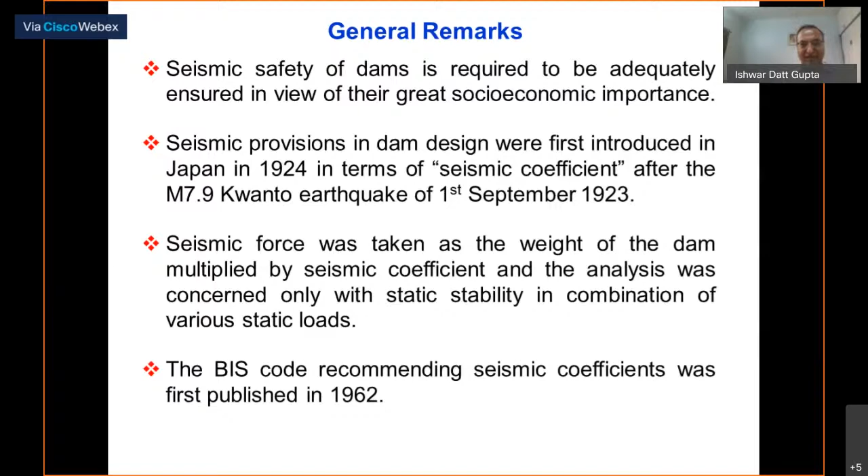The provisions for seismic coefficient in India are defined in the Bureau of Indian Standard Code, first published in 1962 and revised several times, but there has been no fundamental change in the philosophy of design, only updates following the occurrence of some damaging earthquakes in different parts of the country.

The most recent code, brought out in 2016, divides the country into 4 seismic zones, and for each zone gives recommendations for finding the seismic coefficient, alpha H, in terms of a zone factor, the importance factor of the structure, and a response reduction factor to account for the reduction.

And they give a standard normalized spectral shape. So this methodology is largely used along with the design provisions given in another code for concrete dams, that is IS 6512, criteria for design of solid gravity dams.

The entire design is governed by a simple equation in which the sliding of a block of the dam along a pre-selected horizontal plane is designed against all the horizontal destabilizing forces. Here, this is the frictional force and this is the cohesion force.

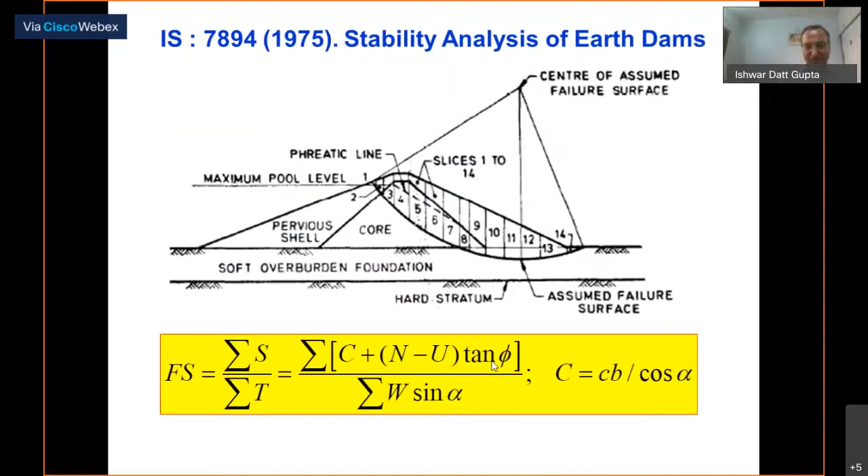So after this experience, to ensure the seismic safety of dam, it is essential to design and analyze the dam for the actual dynamic effects of earthquakes, using the actual earthquake forces expected at the site of the dam, and not the seismic coefficient, which is highly reduced in an artificial way to represent the earthquake forces.

So the philosophy of design has to move to stress analysis, or in case of earth and rockfill dams, to see the permanent deformations under the dynamic effect of earthquakes. So all the dams in our Himalayan region are in fact more prone to seismic damage.

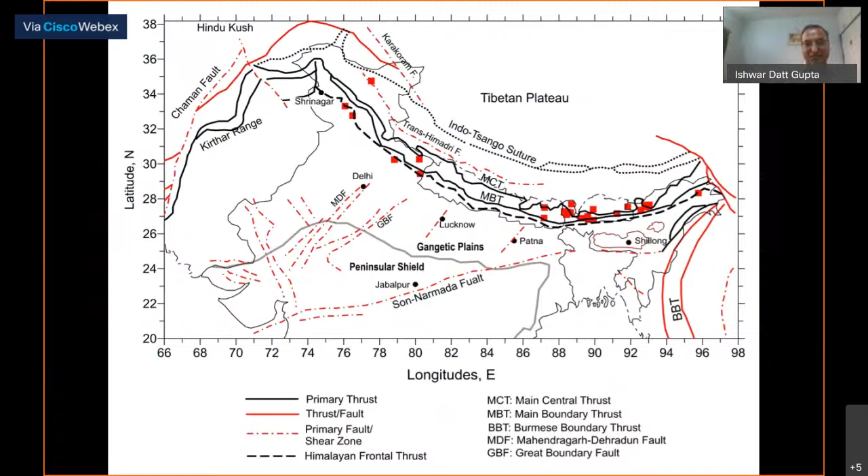This shows the seismicity during the last 200 years, and if we see the Himalayas and northern part, a lot of earthquakes have occurred in the past, and we have experienced 4 great earthquakes of magnitude 8 or more.

We have to definitely design all the dams in the Himalayan zone by dynamic analysis rather than the seismic coefficient, which is not able to ensure and evaluate the seismic safety in an explicit way.

So we have to change the design philosophy from stability analysis to stress analysis under realistic ground motion, using parameters in terms of the response spectra and the acceleration time histories.

Response spectra methods are simple to apply, and can be a replacement for the current use of seismic coefficient, because in principle, the response spectra method has been developed in such a simplified manner that they are almost identical in the analysis to the stability approach.

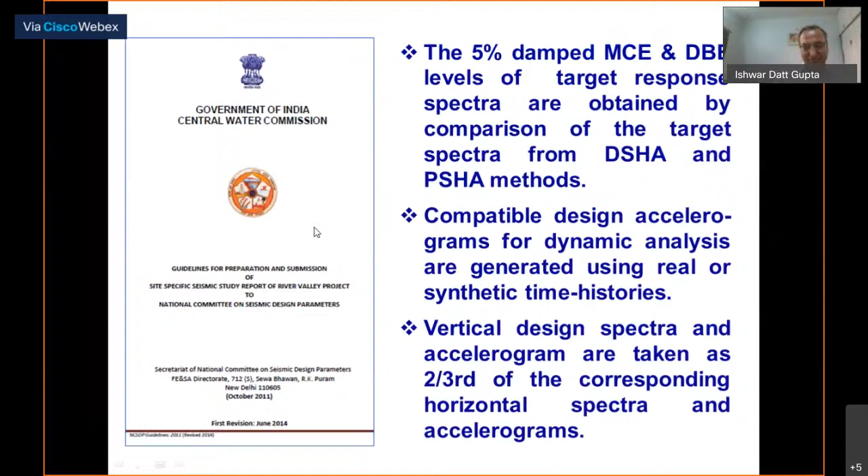And for estimation of these parameters, we are following the guidelines brought out by our National Committee, known as the NCSDP guidelines. NCSDP stands for National Committee on Seismic Design Parameters. And these guidelines are more or less in consonance with the ICOLD Bulletin 148, with slight modifications.

So I will show how we are applying these guidelines with one typical example of a dam site in the Arunachal state of India, that is the easternmost part of the Himalayas, and a dam I analyzed there, and I will show what level of spectral amplitudes and accelerations can be experienced.

So these NCSDP guidelines, which we are following, recommend that we have to estimate the design parameters in a site-specific way using deterministic as well as probabilistic approaches.

The design motion is determined by comparison of both, and if the results from the two methods differ largely, then we have to rationalize the results, because the deterministic approach involves a lot of subjective decisions which at times may not be scientifically rational. So the probabilistic approach provides a benchmark to compare the design parameters from a comparison of the results of both approaches.

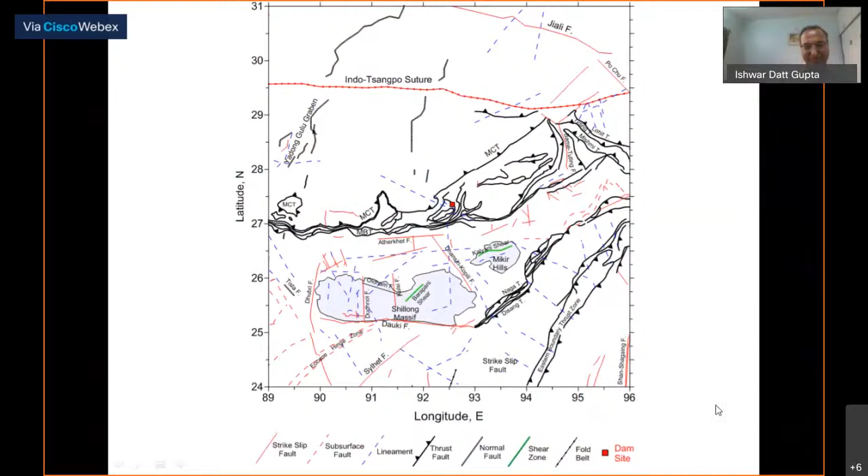And we had a great earthquake in 1897 with magnitude more than 8.2. At that time it was estimated as 8.7. So if we see the seismicity, this entire area of about 7 degree by 7 degree latitude-longitude is studied with the epicenters. So there is no place where there is no seismicity. This is a highly seismic region, and this is the site where we have to estimate the design parameters.

So I told you the first step is to make the various source zones based on tectonic characteristics, the occurrence rate of seismicity, as well as the maximum magnitude which can be expected, considering the variation in the level of seismic potential and changes in tectonic characteristics. We divided this region into 15 different source zones, named according to their tectonic features.

Defining these source zones is the first step, and then we estimate the seismicity for each source in terms of the occurrence rate defined by the Gutenberg-Richter relationship, where log Nm equals a minus bM. Nm is the cumulative number of earthquakes with magnitude greater than or equal to M, and a and b are constants estimated by regression analysis of the past seismicity data.

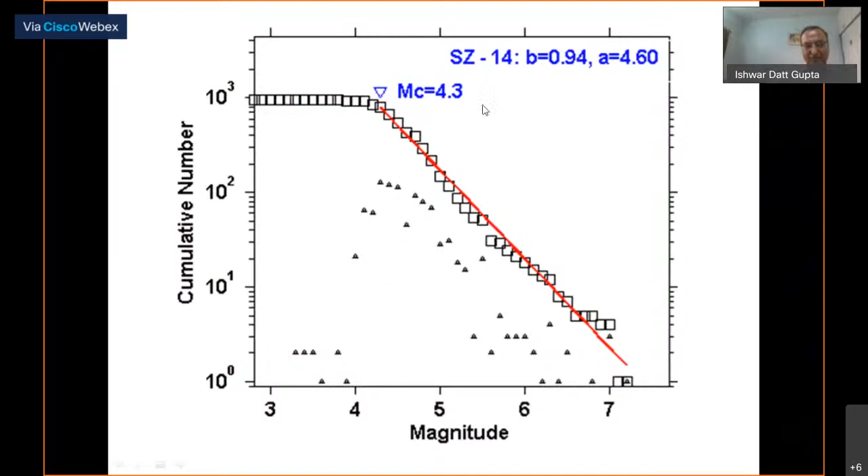So there was a big database of more than 4,000 earthquakes used for this, and we defined this Gutenberg-Richter relationship for each of these source zones by considering the completeness of the earthquakes, because very small magnitude earthquake rates are not accurately captured due to lack of recording for small earthquakes in older periods when instrumentation was very sparse. So we used this relationship for each source zone to define the occurrence rate for different magnitudes of earthquakes.

Then we select an attenuation or ground motion prediction equation, which is used to compute what ground motion can be expected, and this has to be region specific, as we don't have an adequate number of recorded strong motion data to develop our own independent relationship.

I used the limited data available to select the most appropriate equation from the published relations. Using that database, I applied criteria in terms of the statistics of the residues between the recorded data and the predictions from the selected equations.

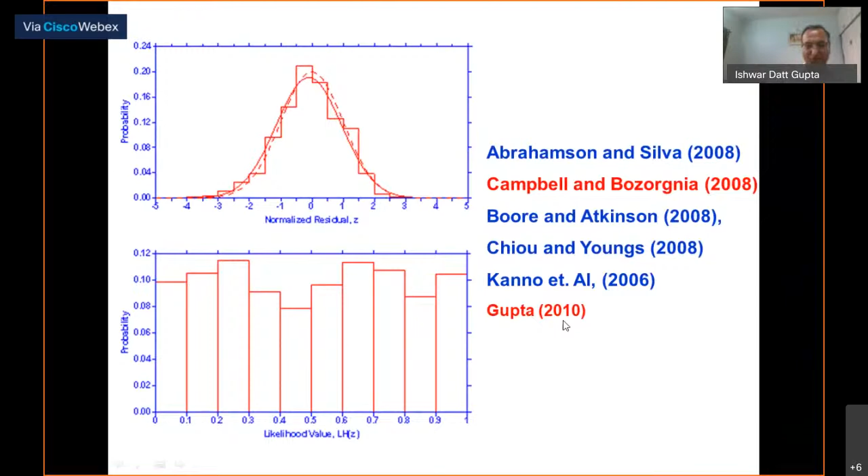Then coming to the deterministic approach, in that we consider only limited combinations of the maximum magnitude and minimum distance at which they can occur on various tectonic features in the region, and select the controlling combination of maximum magnitude and distance.

And for that, we compute the response spectrum with 5% damping from the selected equations for ground motion prediction. That is known as the target response spectrum obtained by the deterministic approach.

But in case of the probabilistic approach, we consider all the expected earthquakes with different magnitudes with their occurrence rates to find out the target response spectrum. So we consider rates, where Lambda n is the occurrence rate of magnitude mj in the nth source.

And this Qn is the probability of exceeding a spectral amplitude due to magnitude mj, distance Ri, from the selected ground motion prediction equation. So by combining all these probabilities, we define a total probability for the exceedance of different spectral amplitudes, and from that we define a uniform hazard response spectrum with 5% damping, which gives us the target spectrum by the probabilistic approach.

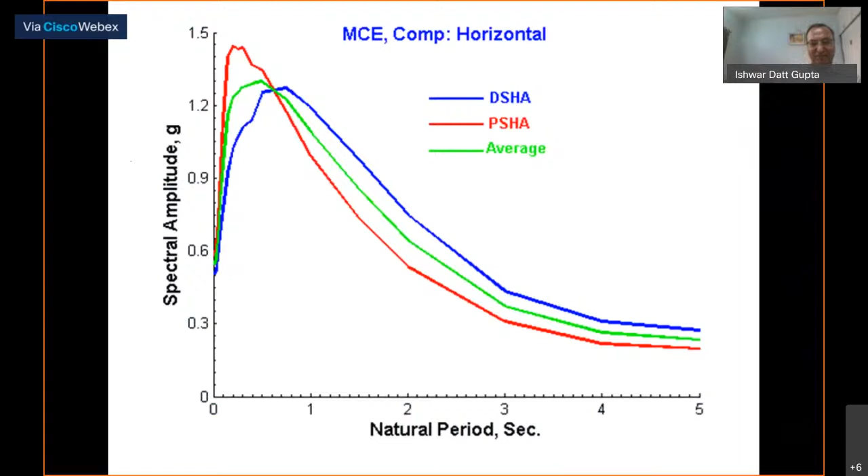So as per our NCSDP guidelines, here we took a weighted average of both the spectra to define the final target spectrum. Similarly, this is the target spectrum for the DBE condition.

And for this target spectra, we then generate the acceleration time histories, whose spectra match this target spectrum closely, and therefore these design accelerograms are known as spectrum compatible time histories.

There are two ways to do it. We can generate these time histories compatible to the target response spectra synthetically, artificially, or we can select real time histories of earthquakes and modify those to match the target response spectra.

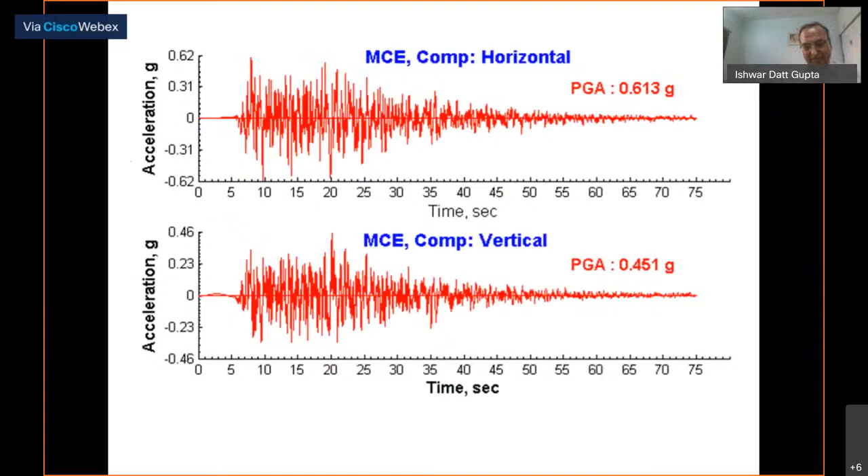If we have to do detailed analysis, then we have to go by a set of recorded time histories modified to be compatible with the target spectra, but for simple linear analysis, synthetic time histories can also be used.

These are the horizontal and vertical time histories for use in detailed dynamic analysis. And from these time histories, because the target spectra are defined for a specific damping...

These time histories are then utilized to generate response spectra for several different damping ratios of 2, 3, 5, 7, 10, and 15% of critical, because we may need the spectra for simplified analysis with different damping values. So these are the spectra and the time histories provided in our site-specific reports.

And this one example I have shown for Northeast India. Now, as this sort of detailed analysis cannot be done quickly and readily for each and every project, particularly for the feasibility stage and initial stage design of dams.

So it is essential that we develop hazard maps which can be utilized to see the stability of the preliminary design of the dam. To illustrate that, I have carried out an analysis where I generated such a hazard spectra and how those can be utilized to generate the target spectra for the northwestern Himalayan region.

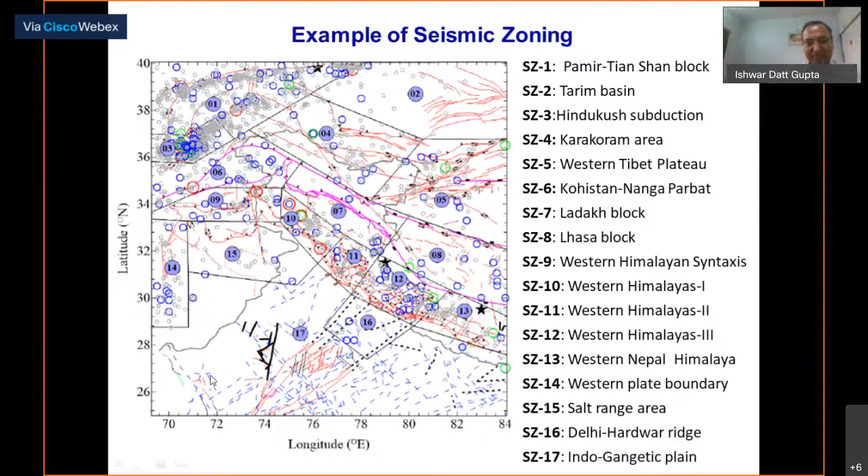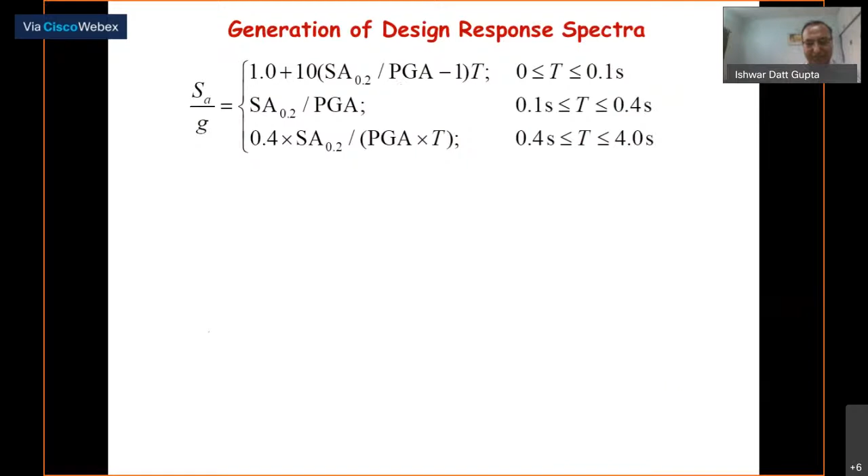And this equation has been based on the ASCE 07 code, but with some modifications to suit our region of interest. Using this equation, we can generate the design spectra, and those are compared with the standard spectral shapes given in our BIS code, based on the ASCE formula and the proposed formula in this study. So they differ slightly.

Design spectra readily generated, a sort of first cut for the site-specific analysis, and these can be used with the simplified dynamic analysis using these response spectral amplitudes to find out the stresses at different elevations in the dam, or to find out the permanent deformation in case of earth dams, and to see whether these are within the permissible limits.

So this is the recommendation that we have to give up the traditional pseudostatic approach and use the spectral amplitudes to find out the stresses or the permanent deformations in concrete and earth dams respectively for their preliminary designs. And if they satisfy these dynamic stability requirements, the static stability is automatically ensured.

Because the static stability is analyzed under much reduced seismic coefficients, and that doesn't automatically ensure protection against damage due to tensile stress. But the stability against tensile stress will automatically govern the stability against sliding and overturning.

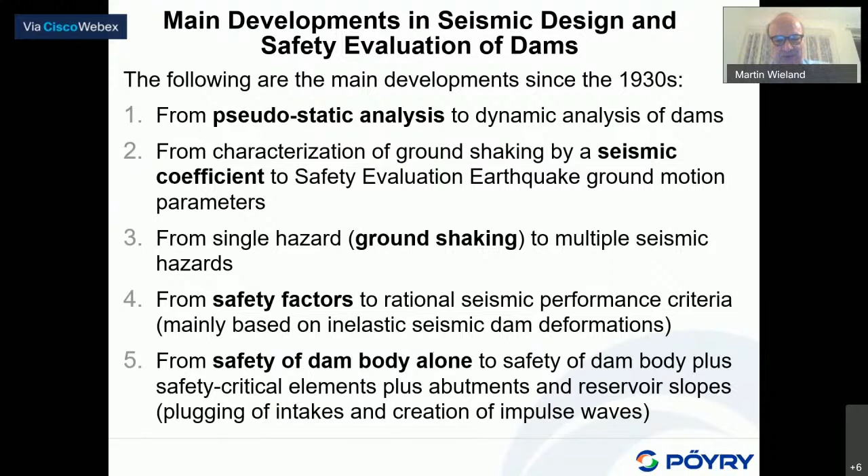So therefore, these reservoir slopes - and even further, as this Indian case has shown - you have to look even beyond the reservoir slopes.

Why do we need safety evaluations of existing dams, and why do we have to do that periodically? I mentioned already at the very beginning that the service life or economical life of a dam can be very long. For an embankment dam, built of natural material, I think it can survive hundreds of years if it is well maintained. For concrete dams, I think they can also survive a long time.

The oldest Swiss concrete dam, which is the oldest one in Europe, is now 140 years old, and the concession has been extended - it will easily reach 200 years. So what has been written in a recent UNU report is that there is a huge threat to people living downstream of aging dams. I think these people, in my opinion, don't understand the problem properly. It is not basically the aging of a dam which increases the risk.

It is more that the people living in a downstream area of a dam has increased rapidly. So therefore, the risk, in the case of a dam failure, has increased substantially.

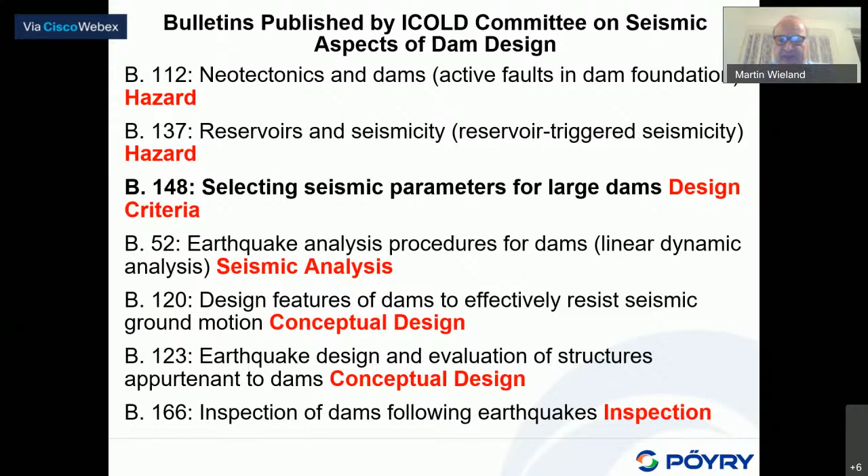There are some design features of dams to effectively resist seismic ground motion, which is concerned with the conceptual design. If you follow this criteria given in the guidelines, you will arrive at a dam which is seismically safe. If you then do the safety check, I must say if you follow this criteria, your dam, especially smaller or medium height dams, will be safe. There are also design criteria on appurtenant structures, and guidelines on the inspection of dams. That is what my committee has been doing in the last year, covering most of the important aspects of seismic safety of dams.

Let me say something quickly about Switzerland. For existing large dams in Switzerland, just to give you an idea, the average age is about 75 years, and we have 202 dams, which are mainly all concrete dams or run-of-river power plants. We have only a handful of embankment dams, which is different from other countries. But in mountainous regions, concrete dams seem to have some advantages.

Just to give you some view of Switzerland here: this is the Grande Dixence Dam, which is still the world's highest gravity dam at 285 meters. Until about 7-8 years ago, it was the world's highest concrete dam. This year it will celebrate its 60th anniversary. No very high dam has been in operation for that long. In India you have the Bhakra Dam, which is also almost of similar age, though a little less high than the Grande Dixence Dam.

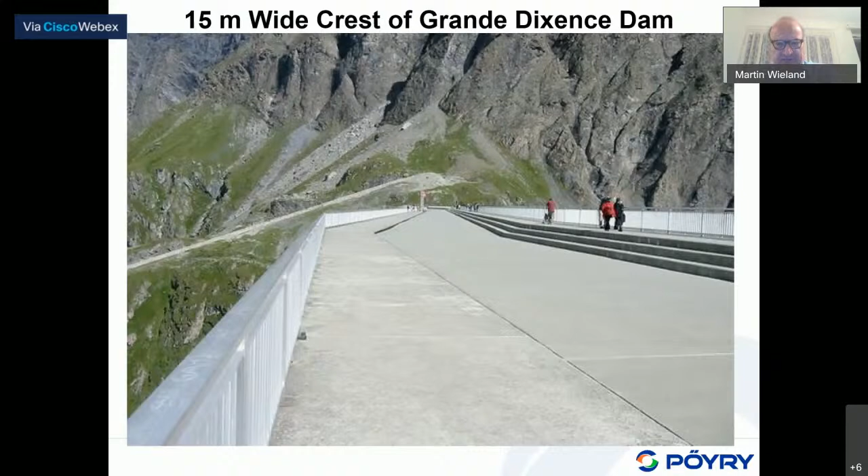This is the same dam. We also have a lot of mountains - of course in the Himalayas, the mountains are 2,000-3,000 meters higher. These are about 3,000 meters here around Grande Dixence, which is at about elevation 2,300. These dams are built in difficult topographical and climatic conditions, and during construction people could only work during summertime. You also have the problem of glaciers, and people have investigated the effect of avalanches in a reservoir and impulse waves created by such incidents.

This is the Mauvoisin Arch Dam. It belonged to our company before. It is 250 meters high, completed in 1956, so it's 63 years old already. As you see here, this picture is from a few years ago, but the concrete looks quite fresh here in wintertime.

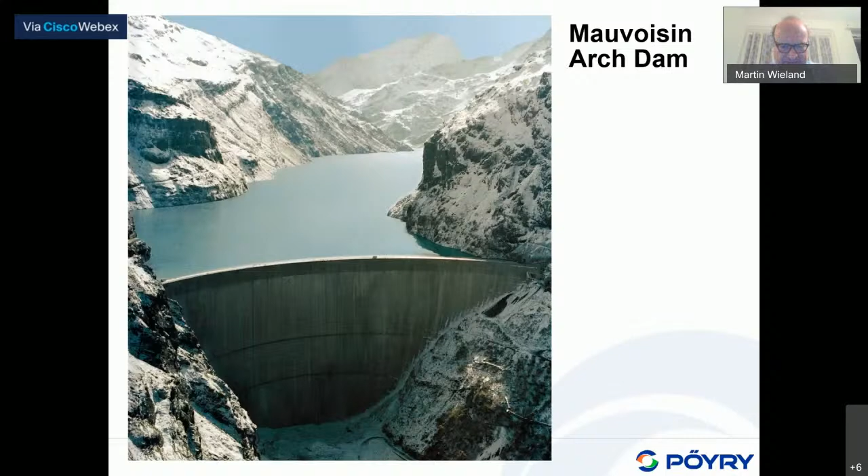A characteristic is that the reservoir rim is quite steep, so it was possible to increase the height of this dam. The original height was 237 meters, and in 1991 the height was increased by another 13.5 meters. Because the dam crest was very thick, 60 meters, it was easy to increase the height by 13 meters without having to strengthen the shell. As I mentioned, for dams with large reservoirs, the crest had to be very thick because of military reasons.

A few examples of dams in highly seismic regions: the biggest dam in the world is the Usoy Dam in Tajikistan. It is 650 meters high, twice as high as any man-made dam. It was created by a huge landslide, triggered by a magnitude 7.3 earthquake 110 years ago. So as I said, if you have a big earthquake like in the Himalayas, you will have thousands of mass movements, some of which may block rivers and transport a lot of debris.

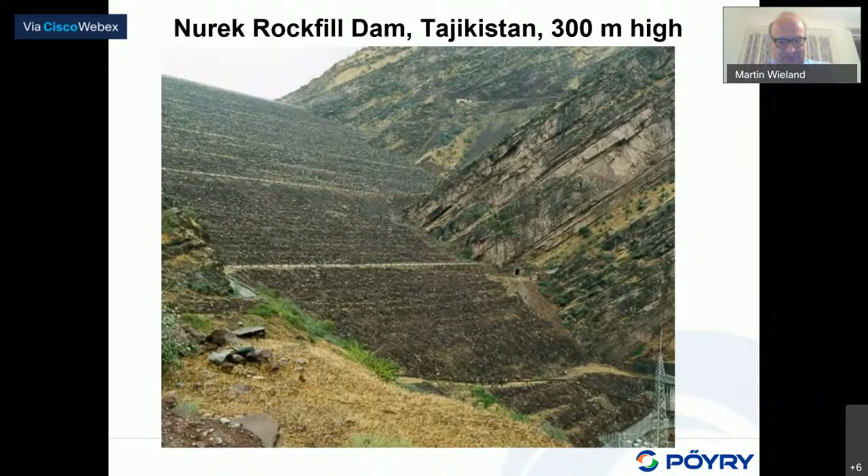This is in that region. What we see here is from the upstream face.

This is also from former Soviet Union. This is the Inguri arch dam. It was the highest arch dam until recently, with 272 meters.

Here in India, people talk about the Tehri dam project. I was also originally involved with NHPC in, I think, 2007, and we did the seismic analysis and design of this gravity dam. I believe the seismic input was provided by Dr. Gupta at that time.

This is a very highly seismic area. This is a project which was just completed in Pakistan, in Kashmir. On the right side you may see a small embankment dam. That is the location of the main boundary thrust, one of the main fault zones in the Himalayas. There was a strong earthquake in 2005 which killed about 80,000 people in that area.

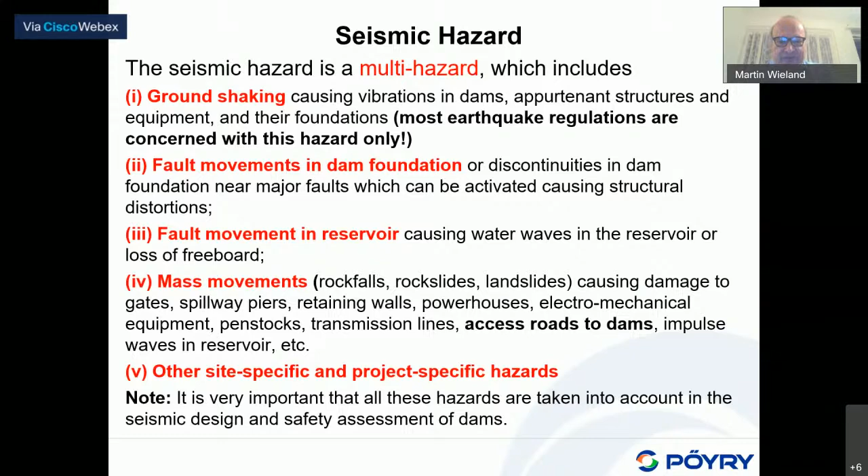In the meantime, people have measured peak ground acceleration close to an earthquake, I think in Japan, up to 4G. So what I want to say is even moderate earthquakes - 5.5 magnitude, 6.2, 5.3 - may create quite big accelerations. But peak ground acceleration is only half of the story, because damage processes in dams depend on the duration of strong ground shaking. If shocks only last 1 to 2 seconds, they do not create big damage. So it is more the long duration - I'm quite happy to have seen the records from Dr. Gupta, who also used, as we propose, a reasonably long duration of strong ground shaking. It is very important to make this conservative assumption.

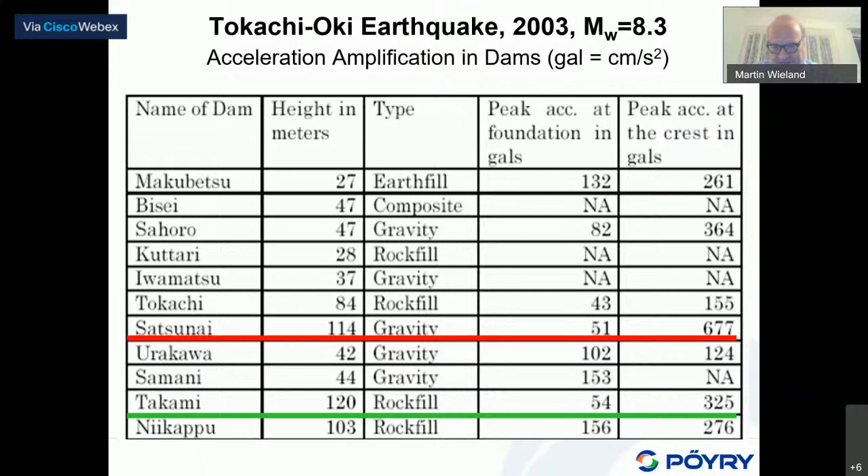The second case, the green one, is a 120-meter high rockfill dam, also with a peak ground acceleration at the base of 54 gals - gal being a Japanese unit, where 1 gal is 1 centimeter per second squared. The crest value is 325, an amplification factor of 6. Usually, seismic analysis of embankment dams gives amplification factors of 1.2 to 1.5, with 2 as an exception, but for smaller ground shaking you can still see quite larger amplification effects. These are actual measurements.

This is an example from the Andaman Islands, which belong to India - the Kalpong Rockfill Dam. The loss was mainly due to tsunami, but this dam also showed a longitudinal crack along the dam crest, on the biggest dam in the Andaman Sea.

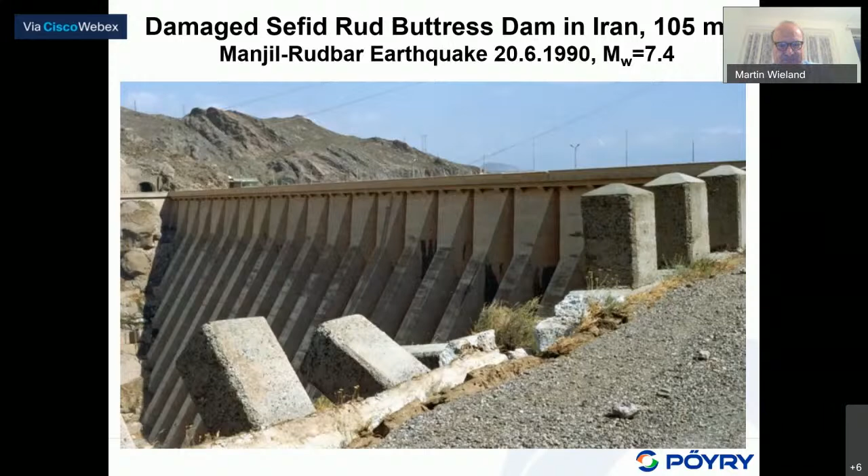Cracks occurred at the upstream face, mainly along the lift elevations. You can assume that in concrete dams, cracks will not occur just anywhere - they occur, for example, at lift elevations, or at elevations where there are sudden changes in geometry, at kinks. This crack is not just a surface crack - it penetrates through the whole dam body, 20 meters into the buttresses.

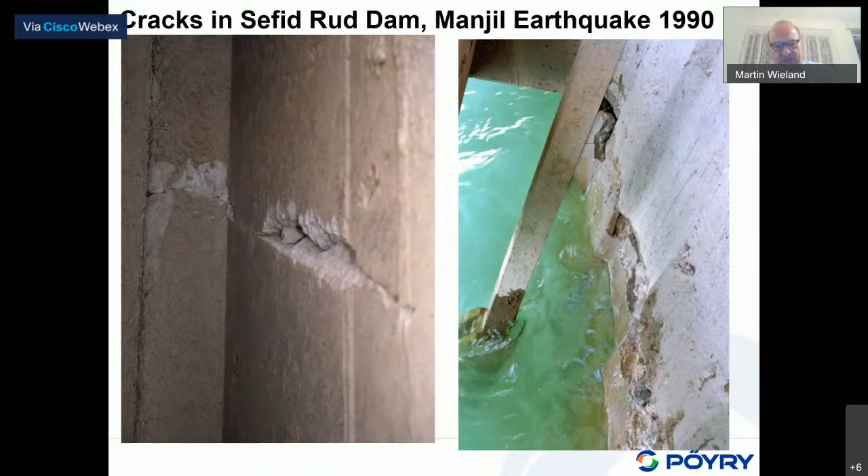This was expected because the buildings are not designed against that high level of earthquakes. The dam itself only had some cracks, but the buildings were all destroyed. You see here some equipment, a transformer that derailed.

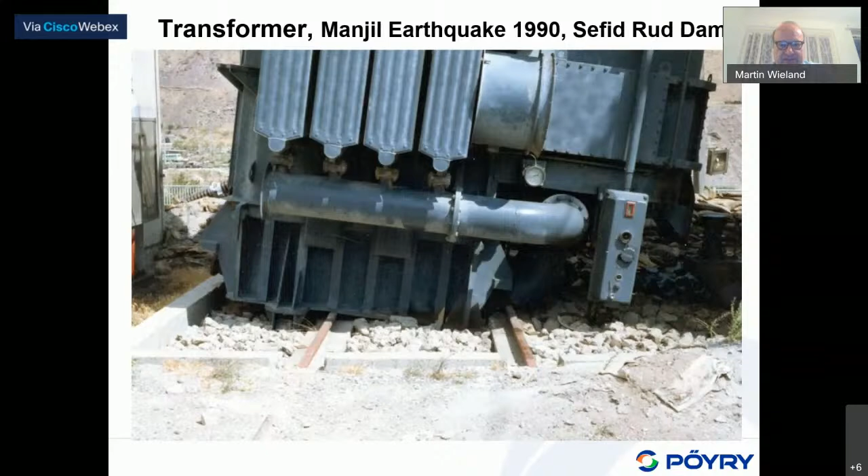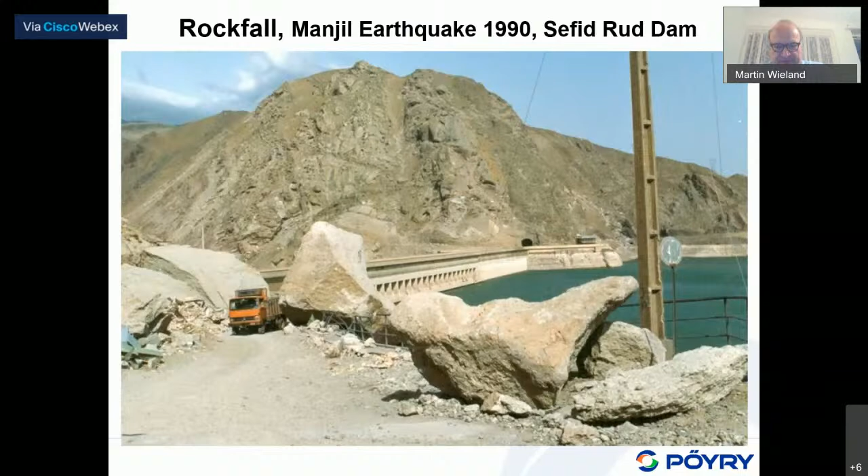The dam was strengthened after that earthquake by a number of rock anchors. Each block had 12 rock anchors with a capacity of 100 meganewtons, 10,000 tons, to strengthen the top where the cracks had occurred.

You see here this work which was going on. It cost about $25 million at that time, in 1990-1991, when this was done - these rock anchors. There was also some leakage, so epoxy grouting was done, and this is some drilling operation for the grouting.

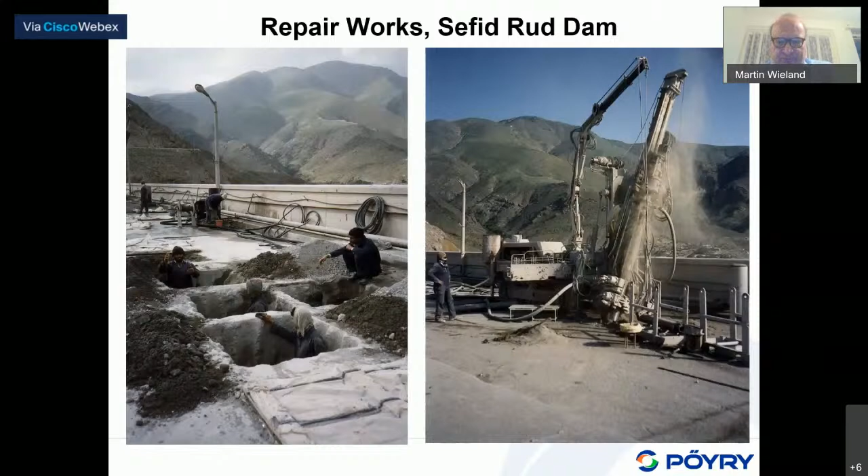These anchors were installed - this is during the installation. It was on all the blocks of this buttress dam.

The famous case is the Koyna Dam in India. You know the Koyna Nagar earthquake, magnitude 6.3 or 6.5 - we like to refer to it in my committee as 6.3. There were some cracks at the location of stress concentration.

The geometry of this gravity dam is unusual. Normal gravity dams have just a constant slope, but here it was decided to heighten the dam during construction, creating this weakness at this kink. After that earthquake, it was strengthened by rock anchors, by anchor bars as shown here.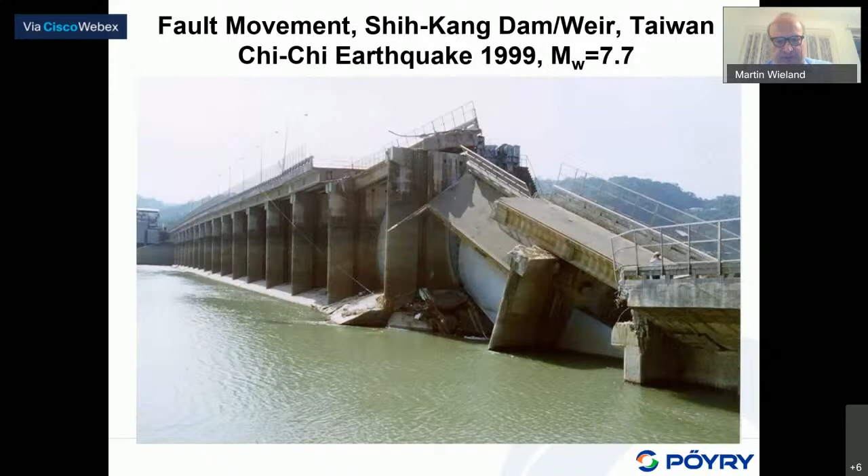If there are major fault movements, you have to assume that concrete structures cannot resist such movements. As seen in Taiwan in 1999, it destroyed 2 openings of this weir. The reservoir was released, but it didn't result in a catastrophic flood downstream because during the monsoon, all 20 or 22 gates are open, so they release much more water than the failure of these 2 gates would. But if you have substantial displacement, you basically cannot prove the safety of the dam. You should not, you must not, build concrete dams across faults. You cannot protect them.

Seismic performance of embankment dams. This is from the Bhuj earthquake. A lot of small earthen dams were damaged. Fortunately, no catastrophic release of water occurred because in January, now 20 years ago exactly, the reservoirs were basically empty.

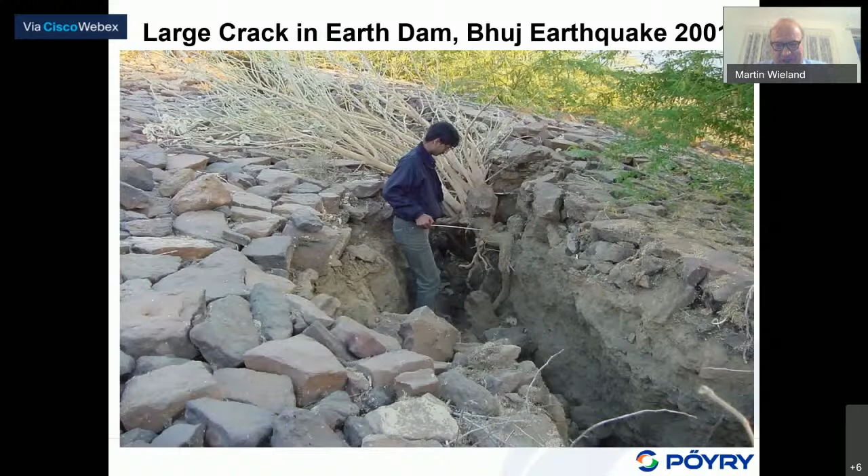Also from the Bhuj earthquake, some cracks, some larger cracks in earthen dams. Some of the cracks are wide. Some people think cracks are very deep, but they are not so deep, because in earth structures, the horizontal stress is about 0.5 times the vertical stress. So the deeper you go, the larger the horizontal stress, which prevents propagation of cracks to greater depth in earth structures.

Some typical cracks. It is Dr. Jain, Sudhir Jain, my old friend. I think now he's director of IIT Gandhinagar.

Liquefaction is a problem, and that is basically why I started my career as an earthquake engineer, because after that earthquake I worked in a laboratory of hydraulics, hydrology, and glaciology at the Swiss Federal Institute of Technology. People were concerned about the earthquake safety of dams, and at that time people still thought that by early warning you could protect the people, but this was a too optimistic assumption. Here is a hydraulic fill dam - this earthquake's anniversary was just 50 years ago, on 9th of February. Due to liquefaction, we have very large displacements of about 60, 70 meters of this embankment dam.

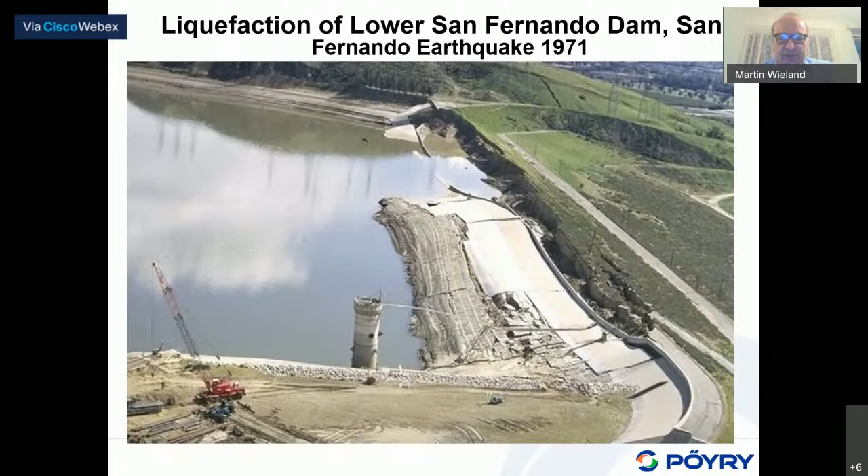Here's another photo of this dam when the reservoir was slightly lowered. This is basically the start of modern earthquake engineering in dam engineering. Since 1971, people basically know that the pseudostatic method is not suitable for checking the seismic safety of dams. It's not something new, it's already 50 years old - people doing structural analysis knew it even earlier. But this earthquake has shown that these methods are obsolete, and based on that experience the development has been going on, and the pseudostatic method has been replaced, but it is still being used in some places, as mentioned - India, China, South Korea, and so on. It should not be used in highly seismic areas.

This is from the Kobe earthquake, which shows that in the upstream face you actually have a slope failure, like the slopes you assume if you do dynamic stability analysis. I must say I have to speed up.

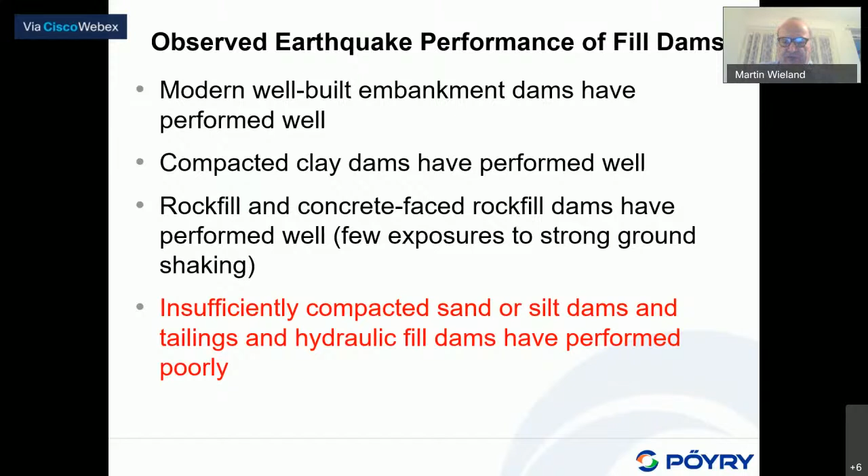Observed earthquake performance of fill dams: modern well-built embankment dams have performed well. Compacted clay dams have performed well. Rock fill and concrete face rock fill dams have performed well. The dams which have shown problems are insufficiently compacted sand or silt dams, mainly tailing dams, and as shown before from the San Fernando earthquake, the hydraulic fill dams. These are the dams which behaved very poorly under strong earthquakes.

Now, seismic design criteria for large dams. The safety criteria are as follows - this is relatively new, so please keep in mind these general safety criteria. Number one, to retain the reservoir, which is what people have always done and are doing now. And the objective, as mentioned at the very beginning, is to protect the communities downstream from a catastrophic release of water. This is always the case.

But number two, which people have not really looked at, we must be able to control the reservoir after an earthquake. Because if your spillway or low level outlets are out of order and the power plant is shut down, you cannot release any water. So depending on how full the reservoir was and what the inflow is, it may overtop days or weeks after the earthquake. People have not really realized that.

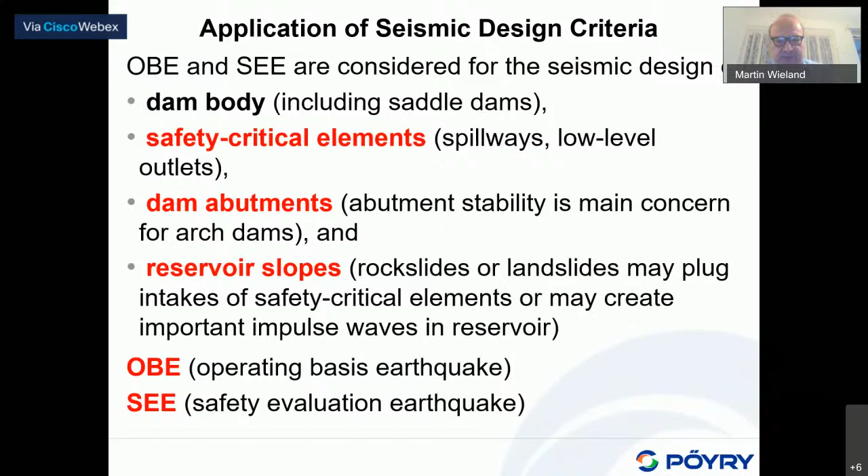Now, what are the good news on the earthquake safety of dams? For water storage dams, I would say embankment dams, only one dam failure with loss of lives worldwide up to now, during the 2011 Tohoku earthquake, 10 years ago, where 8 people were killed in a flood wave released by this reservoir. For concrete dams, no concrete dam has failed which has caused loss of lives up to now.

This is good news. Secondly, tailings dams. Several tailings dams have failed during strong earthquakes in Chile, which caused loss of lives. Tailings dams are a problem, basically because those mining companies' core business or core competence is not in dam engineering, so they think it's a nuisance to have these tailings dams. So sometimes you may get the impression that some of these tailings dams are really not safe, otherwise they would not have failed like in Brazil in recent years, also in Australia.

Note please, the excellent seismic performance of water storage dams shows that the seismic safety concepts in use have been very successful. It does not mean that these dams are over-designed and the seismic safety standards can be lowered, as some people may conclude. So please, the good performance, you should not congratulate yourself and say you can lower your safety standards. It would be a wrong approach. Usually it goes in the opposite direction.

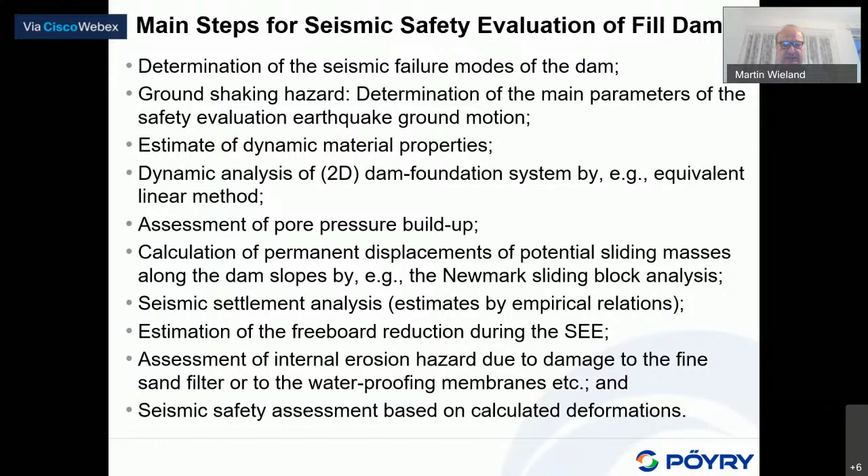Okay, this is for fill dams. For concrete dams it is the same. I must say, for fill dams, the basic failure scenarios are overtopping, because overtopping leads to progressive erosion, and also internal erosion, which also leads to progressive failure of a dam. So you have to prevent these two failure modes for embankment dams. For concrete dams, it is basically the dynamic stability of the dam, and also the dynamic stability of the top portion of the dam.

I mentioned already tailings dams. I must say, as a water storage dam expert, we strongly recommend that the same seismic design criteria should apply as for water storage dams. And even for tailings dams, as they are, they stay there forever, there are even higher seismic standards required, because unlike a water storage dam, they will stay much longer.

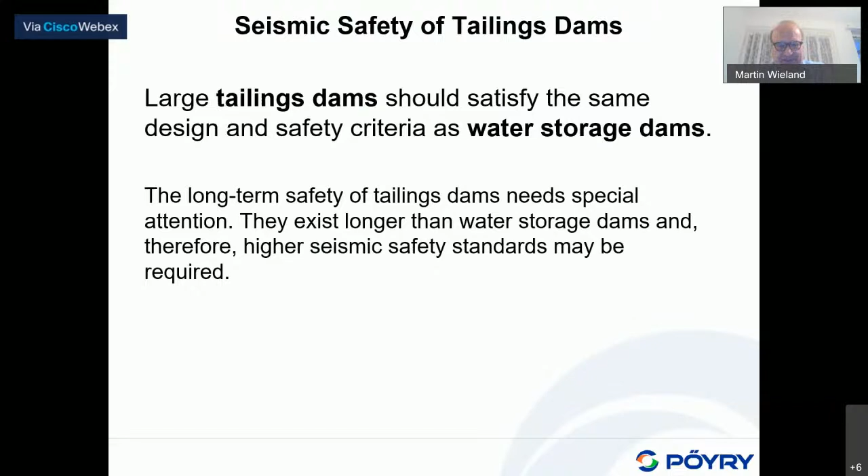Seismic rehabilitation. This is the last part on existing dams.

We recommend you in India and also in other countries to look into the seismic safety of your existing dams. It is most likely that a couple of them have inadequate safety, as in the case of California, which is already a region of very high seismicity.

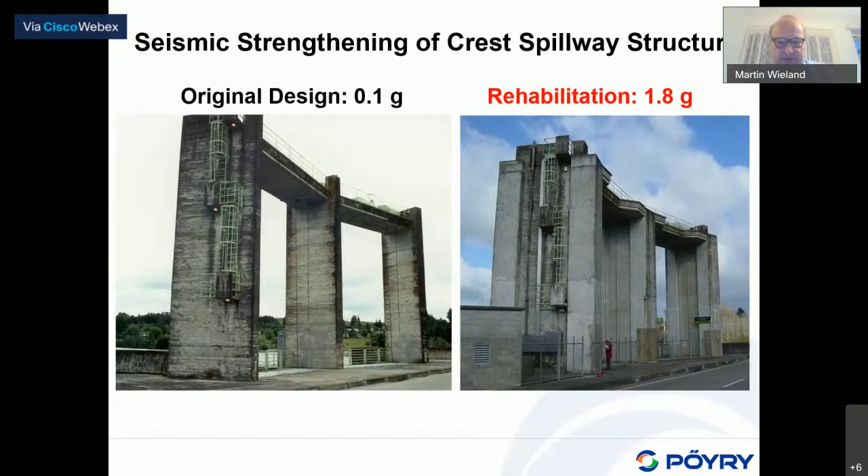For embankment dams, you can do multiple strengthening. You can put berms upstream, widen your crest, heighten the dam, or add a berm on the downstream part with filters.

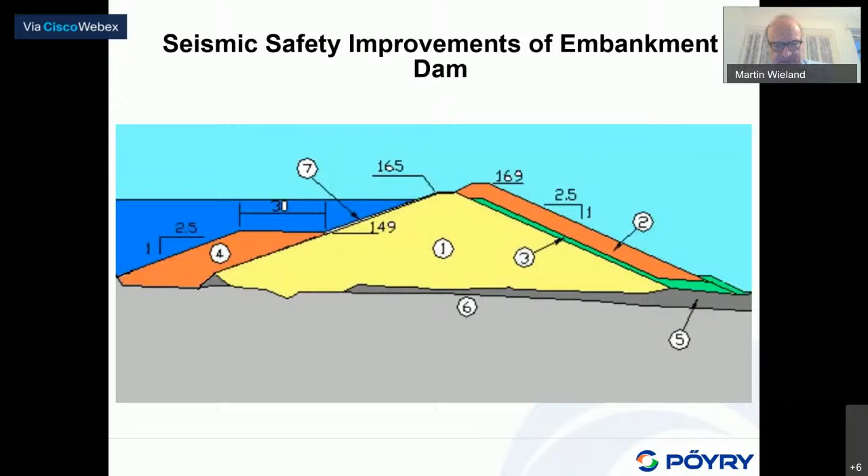Here you see a rehabilitated dam, also in California, using the methods which I've shown in the previous slide.

I mentioned structural safety briefly, but when talking about seismic safety assessment of existing dams, for dams with large damage potential we use a sophisticated safety concept. Today we have to use that, which includes structural safety, and in this case earthquake safety, which I've discussed. But it also includes dam safety monitoring, operational safety and maintenance, guidelines for reservoir operation after earthquakes, and emergency planning, including water alarm systems, evacuation plans, and engineering backup. We have to take all of that into account. In my presentation, I have discussed mainly structural safety aspects.

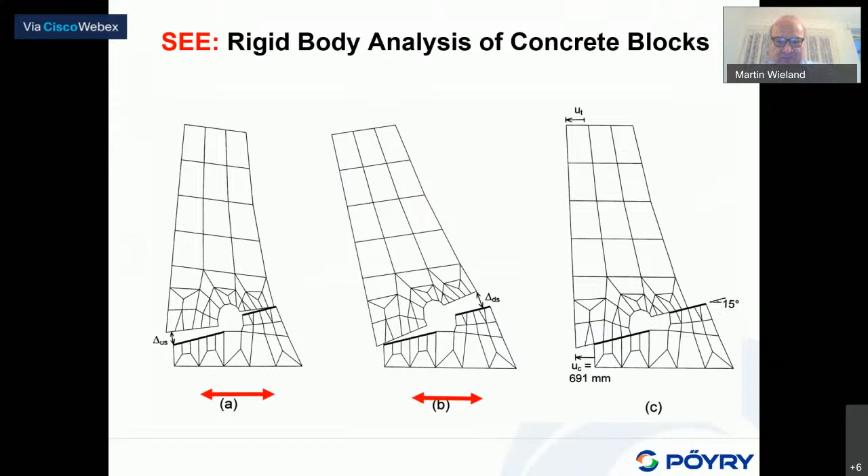So the dynamic analysis for a safety evaluation earthquake, or a nonlinear analysis, could actually be much simpler. There are models, like shown here, that could be much simpler than those used for the linear elastic dynamic analysis.

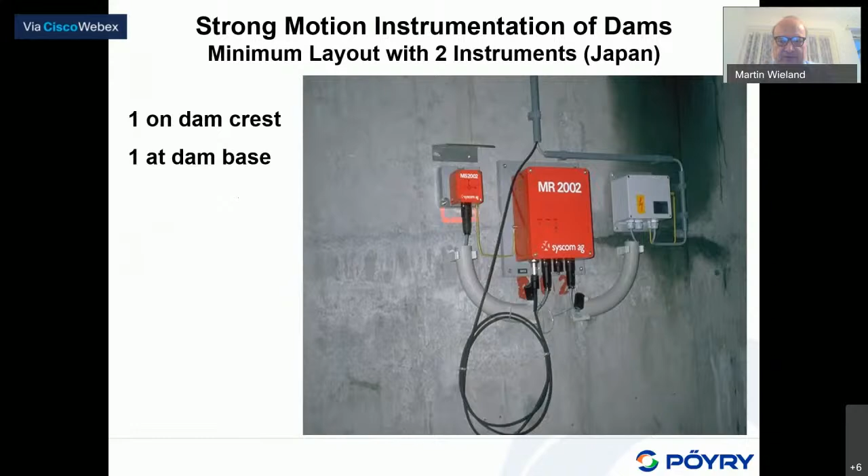Emergency action planning is also important.

So you should have that. Now to come to the conclusions: number one, please keep in mind the seismic hazard is a multi-hazard for most large dam projects.

Ground shaking is the main hazard considered in all earthquake guidelines. The other seismic hazards, such as mass movements, may have been overlooked, like in Chamoli, which has shown this. But it is not just there; we have observed that in several cases.

Number two, the very popular pseudostatic analysis method and the use of seismic coefficients to represent earthquake ground motion are outdated concepts and shall no longer be used for large dam projects. The results of pseudostatic analysis may be wrong. These facts have been known since the 1971 San Fernando earthquake. It's not something new, it's something very old, but people adhere to the pseudostatic method because it is so simple, and maybe some people don't have a proper budget for doing a proper analysis.

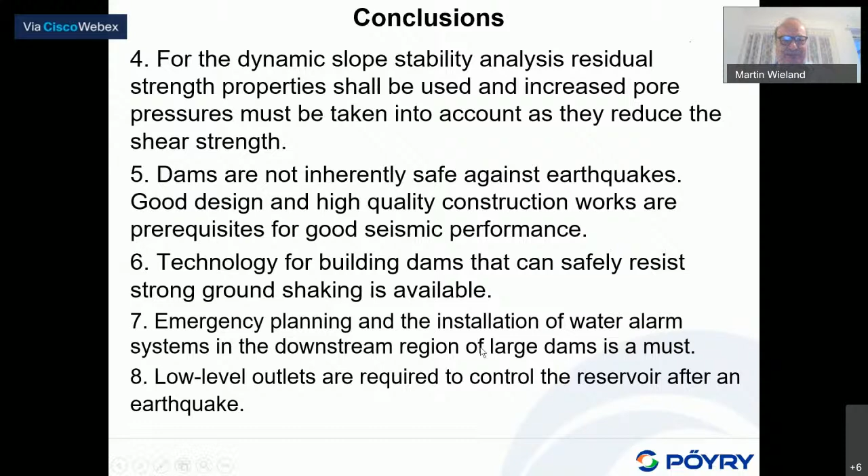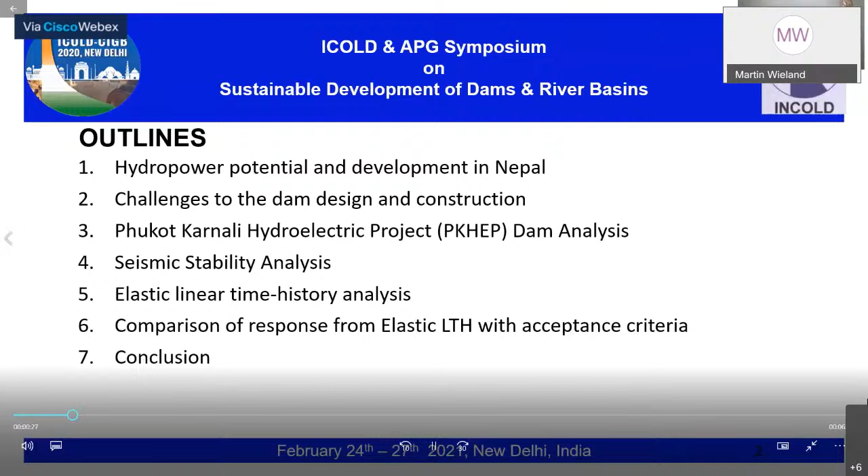Nepal has more than 6,000 high gradient rivers, which shows the high potential for hydropower development. But the development of dams in higher Himalayas is challenging due to its complex topography, unpredictable geology, and high seismicity.

One of the projects, the Betan Karnali hydroelectric project, studied by an engineering company, lies near the MBT. The other two projects are Phukot Karnali hydroelectric project and—we do not see your presentation, I do not see your presentation.

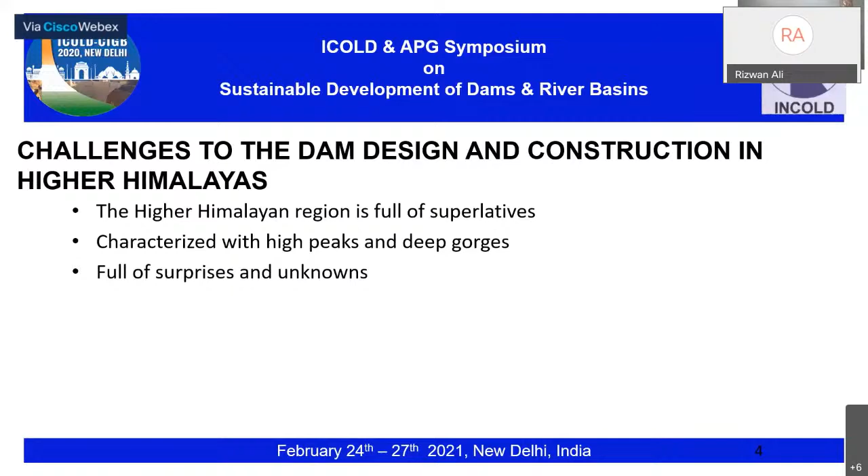These are the plans and sections of the proposed Phukot hydroelectric project dam.

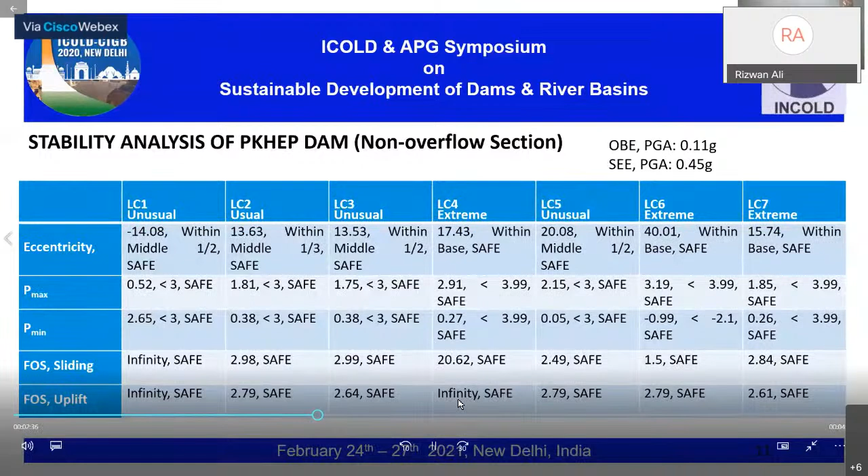Before starting finite element analysis of the dam, stability analysis is performed to obtain an initial section of the dam. The dam stability analysis is performed based on USACE guidelines. After the stability analysis, finite element analysis is performed to check the response of the dam in more detail.

Elements of the dam and the foundation are modeled as 2D plane strain elements. The foundation is modeled as massless. Height of the tallest section is 160 meters from the riverbed to the bedrock, and base width is 150 meters.

The material properties assigned during finite element analysis are as shown. The site-specific hazard analysis is performed and response spectra are prepared for different return periods. Five sets of response spectrum matched acceleration time history records are used to evaluate the seismic response of the dam.

Both horizontal and vertical acceleration time histories are assigned in the finite element model. Hydrodynamic load is assigned as Westergaard mass.

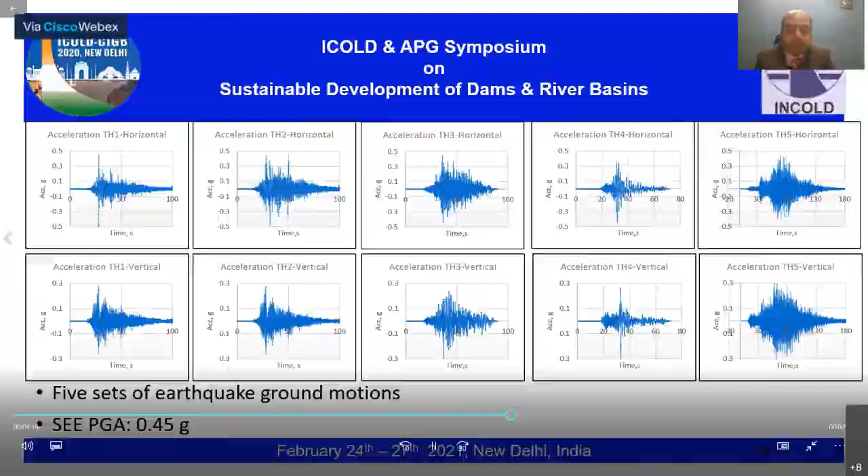The linear response of the dam is evaluated based on envelopes of maximum stresses and time history of maximum stresses.

Among the 5 sets of earthquake records, one time history record gave maximum top displacement of 236 millimeters.

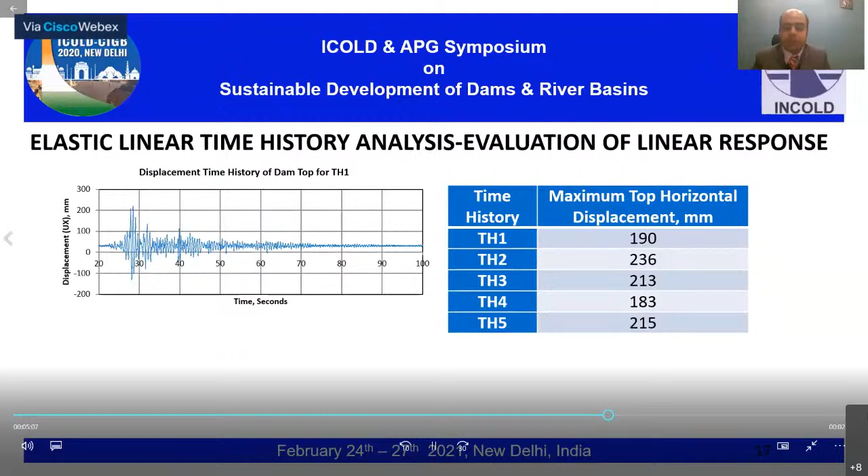Acceptance criteria of the linear time history are based on USACE guidelines, which suggest measuring acceptance criteria through a plot of overstress area versus demand-to-capacity ratio, and a plot of cumulative inelastic duration versus demand-to-capacity ratio.

Results show that the response of the dam is slightly higher than the acceptance criteria for the elastic range. Cracking will start at the heel of the dam, which can be best assessed by performing nonlinear time history analysis.

In conclusion, linear elastic time history analysis indicated that the dam suffers cracking at a limited area of the heel, and nonlinear time history analysis will be necessary for a better estimate of this. Results showed that the instantaneous sliding factor of safety rarely falls below 1, indicating safe sliding.

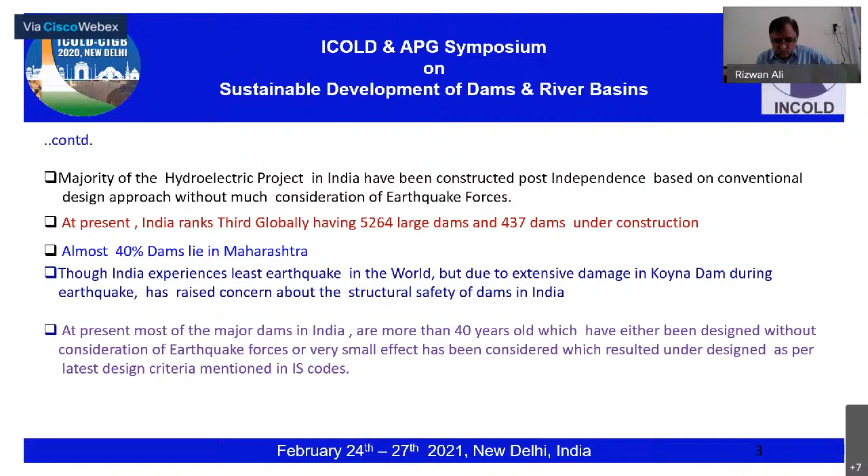Dam failure results in a catastrophic breach followed by a flood wave, often with considerable loss of life and property. Safety during design, construction, operation, maintenance, and surveillance of dams is a must.

Main causes of gravity dam failure: lack of shear strength and discontinuity in foundation, excessive uplift in foundation, inadequate or non-existent drainage system, lack of dam stability, excessive or differential deformation of the foundation, piping and erosion in the foundation caused by high permeability, flaws in design, lack of supervision during construction, and monitoring or warning systems being out of order.

Human error during site investigation, design, construction and operation; inadequate foundation investigation; incomplete data on available material; incomplete first impoundment; frequent strong earthquakes; decay due to aging effects; incorrect operation of floodgates; insufficient monitoring and data analysis; lack of preventive measures or repair work; accidental damage may create apprehensions about the safety of the structure, like in Uttarakhand.

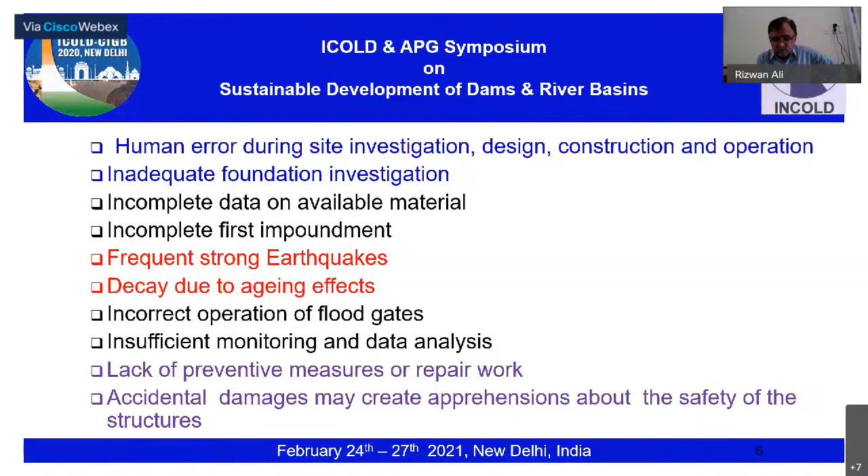Symptoms of distress in dams are observed in the form of cracking, spalling, concrete disintegration, and seepage.

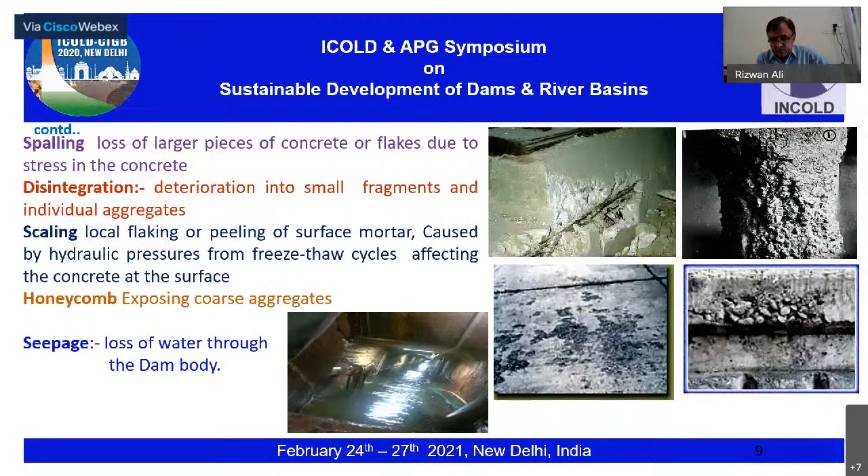Spalling is the loss of larger pieces of concrete or flakes due to high stress in the concrete, as in figure 1. Disintegration is deterioration into small fragments and individual aggregates. Scaling is local flaking or peeling of surface mortar caused by hydraulic pressure and freeze-thaw cycles affecting the concrete at the surface. Honeycombing exposes coarse aggregate due to poor compaction and excessive seepage through the dam body.

The consequences are as follows: heavy leakage or seepage, development of cracking, large displacements, heavy leaching of cementitious material. Due to aging, safety of the water conductor system also gets affected, raising apprehensions about the structural safety of the dams.

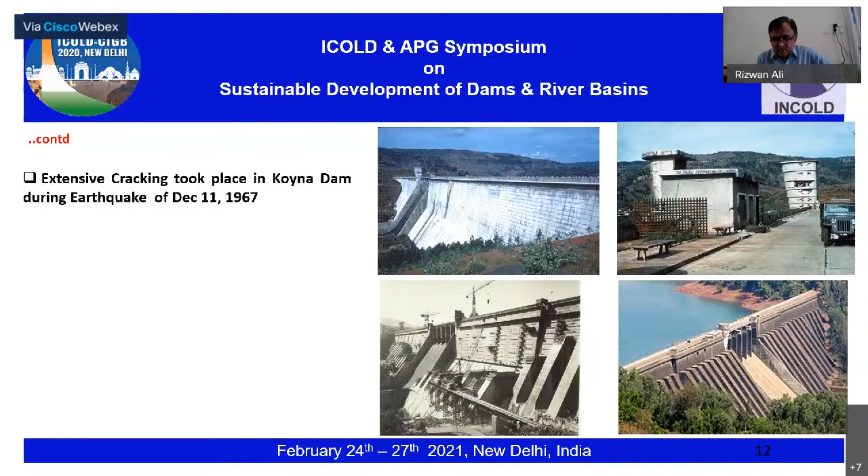There was sudden discharge in Bhandardara Dam due to internal cracking, so this dam underwent strengthening, and a structural safety audit is again going on. This is also a masonry dam.

This is a common feature in most old dams, particularly masonry dams. A lot of leaching of cementitious mortar is taking place in downstream faces, foundation galleries, and inspection galleries, raising apprehensions about the safety of these dams.

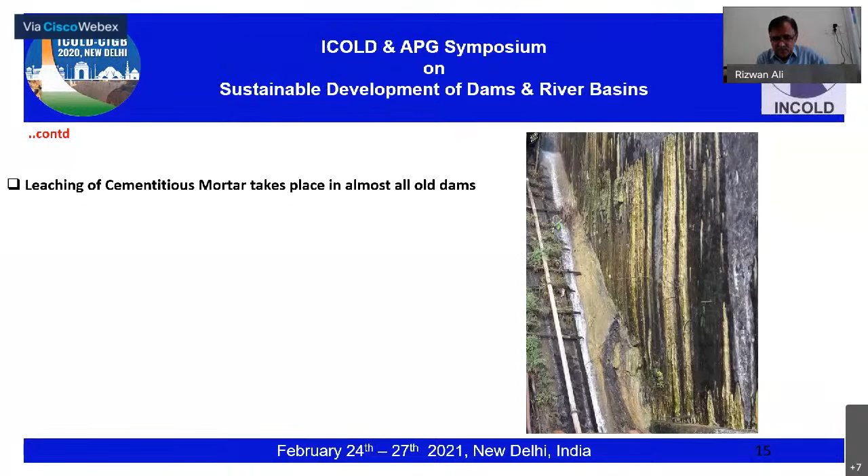This brings us to the requirement of safety review of dams. Frequent strong earthquakes, decay due to aging effects, and accidental damage may create apprehensions about the safety of the dam and necessitate rehabilitation and strengthening of existing dams.

Stability and stress analysis of dams is much more complicated and involved than for other structures. Interaction between the dam and the foundation rock, and hydrodynamic forces, need to be modeled in a realistic way. Methods of analysis need to be applied suitably to get a correct estimation of the response, as results are very sensitive to the approximations and idealizations made. Dynamic results need to be calibrated by monitoring the response to actual earthquakes and forced vibration tests.

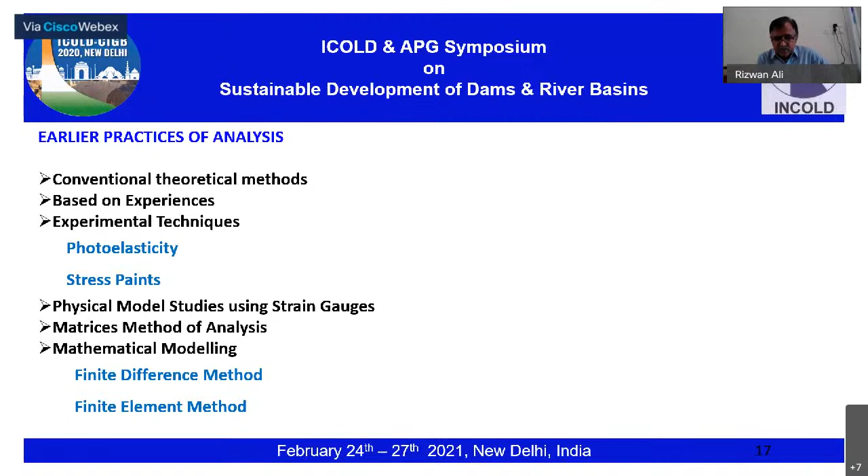Earlier practices of analysis were conventional theoretical methods based on experience, or experimental techniques like photoelasticity, stress paints, physical model studies using strain gauges, and matrix methods of analysis. Now the method is mathematical modeling using finite difference method and finite element method. Old dams like Hirakud Dam and Bhakra Dam have mostly been studied by the photoelastic technique at CWPRS.

Methodology for reviewing structural safety of dams includes: physical inspection of the dam, assessment of weak zones in the body of the dam by seismic tomography, in situ determination of properties of the dam material by nuclear and sonic logging, identification of seepage routes by tracer technique, laboratory determination of properties of the dam material, in situ determination of material properties by flat jack test, estimation of site-specific seismic parameters, stability analysis of the dam by FEM under static and earthquake loads, and improving structural safety through repair and strengthening. Most of the challenge for old dams is to estimate the in situ material properties.

For concrete dams, you can take the core. For masonry dams, it is a big challenge to assess the properties, so indirect methods are utilized to know the properties of the masonry.

Types of structural stability analysis of dams are: conventional analysis, that is vertical cantilever beam analysis; 2D, 3D static analysis by FEM; 2D, 3D pseudostatic analysis using FEM; and 2D, 3D pseudodynamic analysis using FEM.

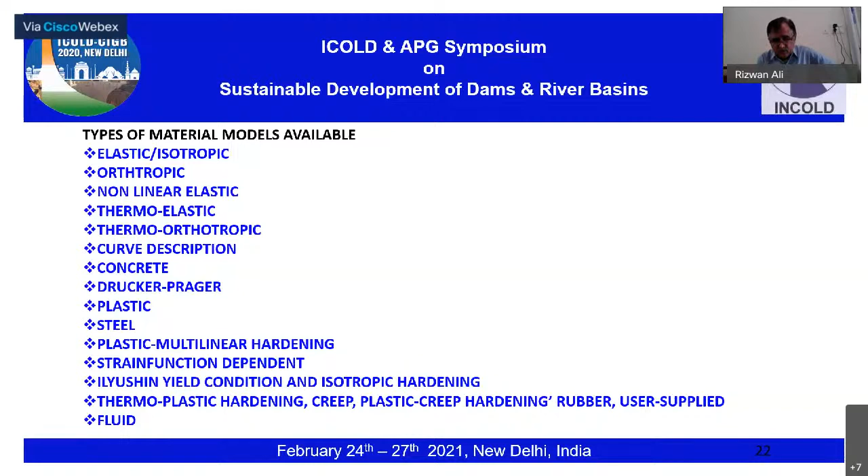This has already been discussed.

After this, allowable stresses is also a big issue in dams. As per IS 6512/1984, the tensile stress in concrete gravity dams under the simplified approach is taken as 4% maximum of the characteristic cube compressive strength. As per the latest design practice in India, the tensile stress using modern rigorous methods of analysis under static and dynamic conditions is taken as 1/8 to 1/10 of the characteristic cube compressive strength, as per CWPRS practices.

As per international practices, the split tensile test or modulus of rupture test is used to determine the tensile strength. For initial design investigation - static, pseudostatic, pseudodynamic and linear dynamic analysis - permissible tensile strength of concrete is calculated by Raphael's approach, that is, direct static tensile strength FST equals 1.7 FCK power 2/3, in PSI.

Similarly, static tensile strength determined by split tensile test is increased by 1.33 to be comparable to the standard modulus of rupture test. So flexure tensile strength is found as 1.33 times direct tensile strength, which comes out to 2.3 FCK power 2/3. Dynamic tensile strength of concrete, calculated by increasing static tensile strength by 50%, comes out to be 2.6 FCK power 2/3.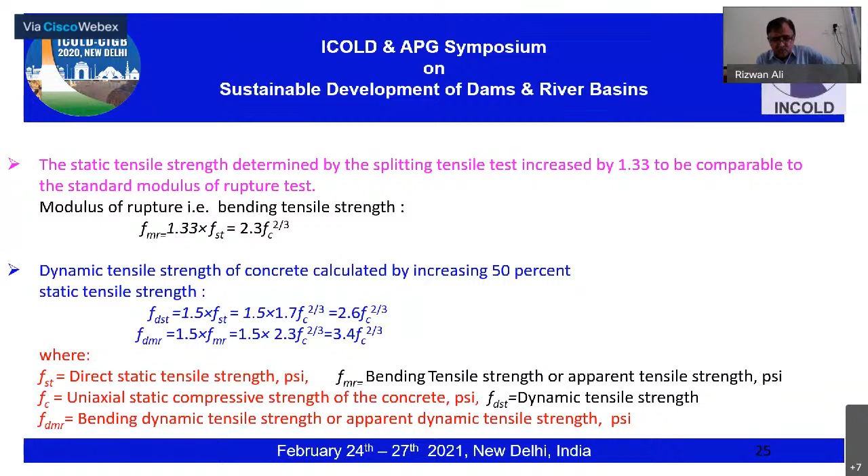This is the acceptance criteria for gravity dams, as mentioned in the latest draft IS code as well as engineering monographs. The demand capacity ratio, DCR, is computed as the ratio of stress demand to the static tensile strength of the concrete. If DCR is less than or equal to 1, no damage is seen in the dam and the dam is considered safe.

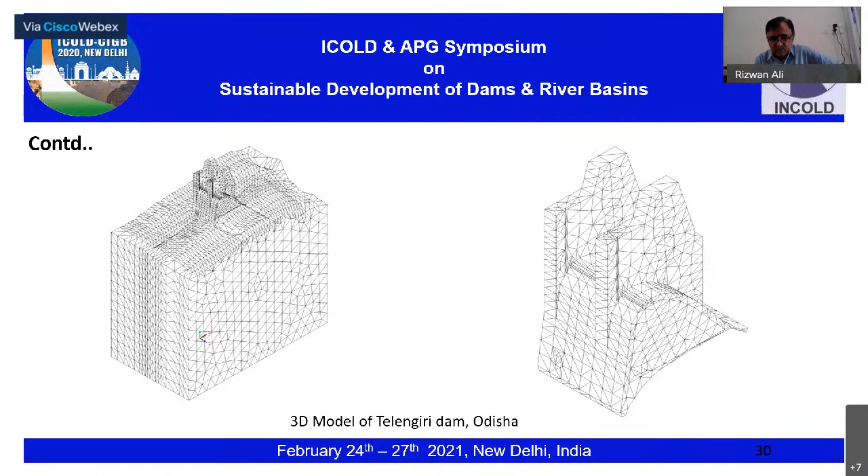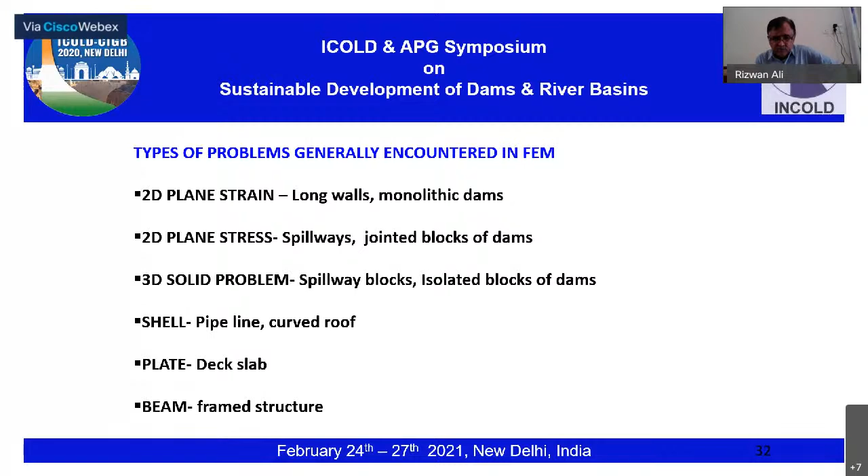Types of problems encountered in FEM generally: 2D plane strain problem, common where earlier dams were constructed without any joints, so we carry out this 2D plane strain analysis for long walls and monolithic dams. Then 2D plane stress problem, where we can simplify spillway problems and jointed blocks of the dam. 3D solid problems are more common because dams have many openings, so we can reproduce any type of opening - generally we carry out 3D solid problem analysis for spillway blocks and isolated blocks of the dam. Then shell type problems, that is penstock type problems, then plate and beam problems.

So this is the stability criteria mentioned in IS code 6512/1984. The dam should be safe against overturning at any horizontal plane within the structure, at the base, or at any plane below the base. It should be safe against sliding on any horizontal or nearly horizontal plane within the structure, at the base, or at any rock seam in the foundation. The allowable unit stresses in the concrete or in the foundation material should not be exceeded.

So this is the equation for how we compute this in FEM. F is equal to (W minus U) tan phi upon F phi, plus CA upon FC, divided by P. Here W minus U is the net downward force, where W is the self weight of the dam, U is the uplift pressure, and C is the cohesion at the interface. P is the destabilizing force, that is hydrostatic pressure and other horizontal forces, including inertia forces in case of earthquake analysis. This equation can be simplified in terms of stress if we divide by the area of contact, giving F equals sigma zz tan phi divided by F phi, plus C upon Fc divided by sigma yz, where sigma zz is the vertical downward stress and sigma yz is the shear stress at the contact.

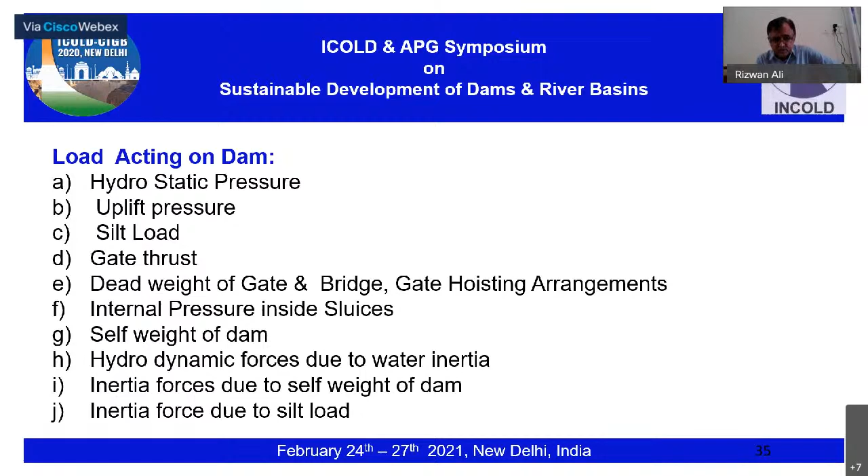These are the 7 load combinations as per IS 6512/1984. We carry out analysis under these 7 load combinations: construction, normal operating condition, flood discharge condition, flood discharge with extreme uplift, and 3 dynamic load combinations - empty with earthquake, normal operating with earthquake, and normal operating with earthquake with extreme uplift pressure.

This is one case study of Hirakud Dam. This problem was referred to us because there were problems of concrete dislodging at the bell mouth entry of the under sluices, because this concrete had become weak due to alkali aggregate reaction. This problem was first referred as a hydraulic problem, but nothing could be done to modify the spillway at this stage, so it was again studied as a structural problem.

So we had to identify the main reason why the concrete is dislodging at the bell mouth entry. In 1990, 30 years back, they had repaired these under sluices by removing the concrete and using epoxy mortar and concrete. But again this dislodging started, and a very large amount of concrete is dislodging at the bell mouth entry. So this problem was referred to us.

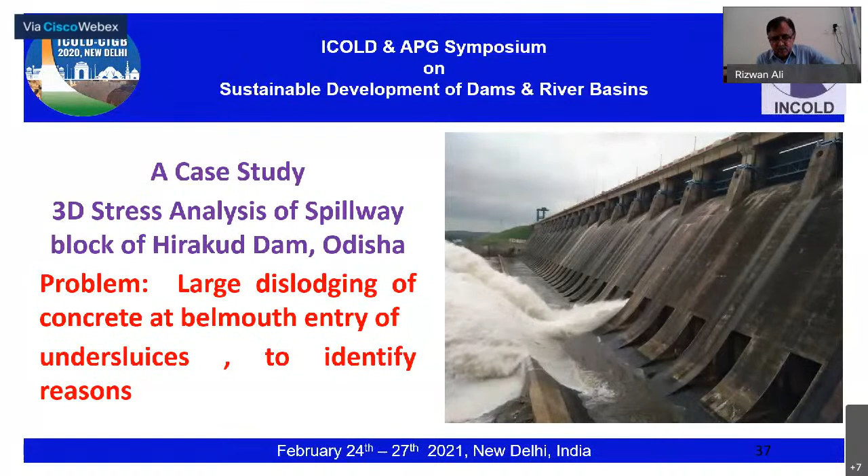So these are the salient features of the Hirakud Dam. Hirakud Dam is a composite dam constructed in 1957-58 near Sambalpur on the Mahanadi River. Length of the dam including dikes is 25.46 km. Maximum height of the spillway is 60.96 meter. Purpose is irrigation, hydropower, and flood control. It lies in seismic zone 3. The spillway has under sluices, each block having 2 under sluices, with total under sluices around 64.

It has two spillways. The objective was to check the stability of the spillway block under static and earthquake forces, conforming to IS 6512-1984 and IS 1893 Part 1 2002.

So here the main challenge was to determine the in situ material properties. For that we tried various techniques, but most of the techniques were very difficult to apply at the dam because the reservoir is always filled. So we decided to take cores from the typical block which has the maximum alkali aggregate reaction, where leaching is more and cracking is more.

We selected two blocks, one left spillway and another right spillway, and finalized the location between the two sluices in the operation gallery. Then we extracted cores of 15 centimeter diameter to 30 centimeter length from two locations, up to the foundation gallery.

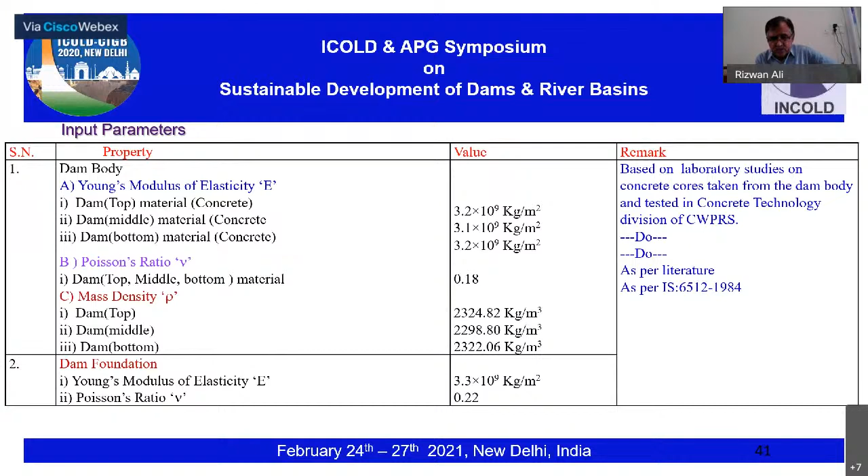Other parameters were taken based on IS code: density of water, and silt density in horizontal suspension as 1360 kg per cubic meter, vertical density of silt in suspension as 1925. Seismic coefficients were estimated based on IS code 1893/2016 Part 2 by taking the ratio of importance factor and response reduction factor as 1. We got around 0.24 horizontal seismic coefficient, and half in vertical and half in longitudinal, so we have taken 0.12 and 0.12.

This is the model including foundation. We have reproduced the foundation block, taken as more than 2 times the height of the dam. We have reproduced all the openings, that is foundation gallery, operation gallery, as well as 2 sluices, and the spillway, piers, all these things. We carried out this idealization with 17,000 nodes and 80,709 linear tetrahedral solid elements. Deflection has been assumed as 0 at the base of the foundation, and along all the sides we have allowed settlement. Because of so many openings, it was very difficult to use solid brick elements.

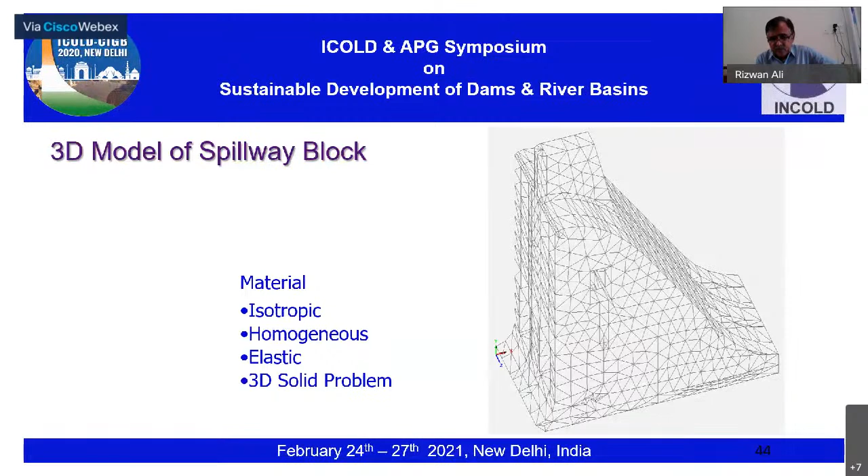Results have been obtained in the form of direct stress, that is horizontal stress, vertical stress, and longitudinal stress, then shear stress, also in the form of principal stress, minimum principal stress, and deflection in 3 directions. We have plotted the contour surfaces of all the stresses and displacement along 3 directions.

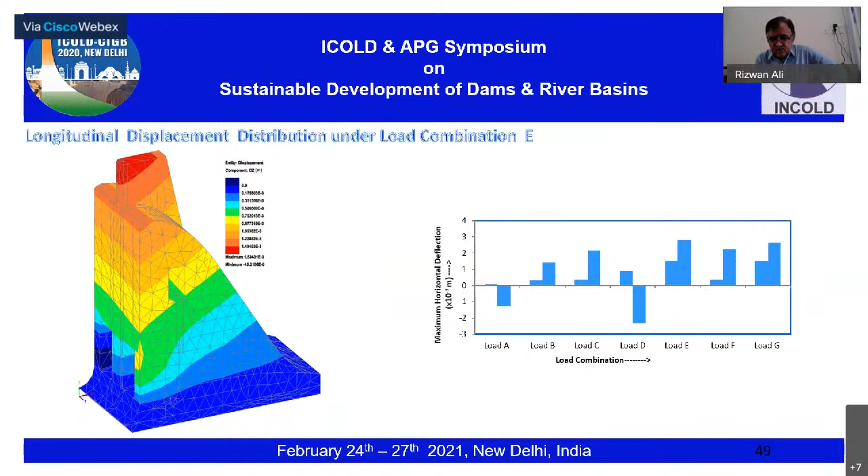This is the vertical settlement, also less than 3 mm. This is the longitudinal displacement, also less than 3 mm.

This is the deformed shape of the dam, for combination C and E here.

These are the distributions of the maximum principal stress, tension. You can see very high tension coming around the openings of the bell mouth entry under the normal operating condition load B, as well as the normal operating condition with earthquake. So the area in tension is very large.

This is the variation of the maximum principal stress. It is going up to around 16 kg per cm square under earthquake load combinations.

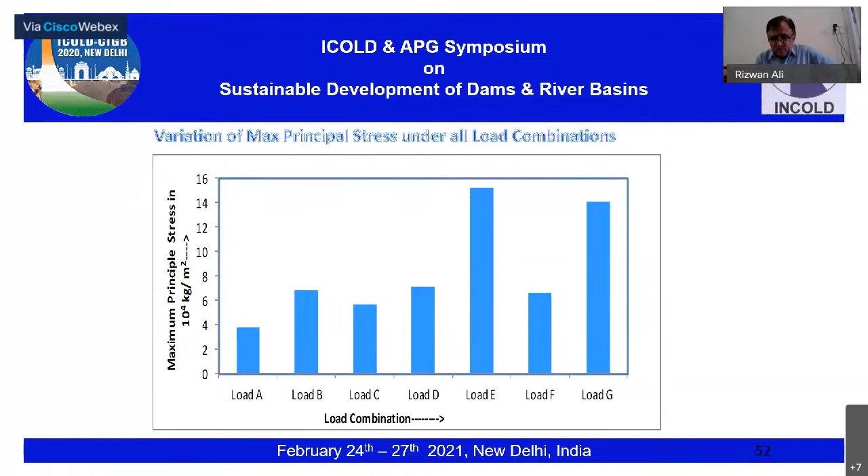This is the distribution of the minimum principal stress, compression. At the downstream face you can see the compression. The compression is not much, it is less than 30 kg per cm square.

So these are the results. You can see this coming around 15.2 kg per cm square tension under earthquake load combinations, and displacement is around 2.81 mm maximum. Horizontal, vertical is also less, and longitudinal is also less.

Findings of the study: the structural safety of old major dams should be assessed using in situ material properties and site-specific parameters for modern practices such as FEM. From the analysis, it has been observed that the maximum principal tensile stress varies from 3.886x10^4 to 15.2x10^4 kg per square meter under different load combinations. Maximum tensile stress occurs near the heel portion and bell mouth entry of the spillway blocks. A very large volume of the blocks comes under tension during earthquake load combinations as well as static normal operating conditions.

Though the mass concrete inside the dam body has very high strength as indicated by core test results, surface concrete near the bell mouth entry might have become weak due to aging and acidic water effect, resulting in dislodging of concrete at some places. This is because there is a paper mill upstream of Hirakud Dam, so the water is acidic in nature, causing acid effect on and decaying the concrete.

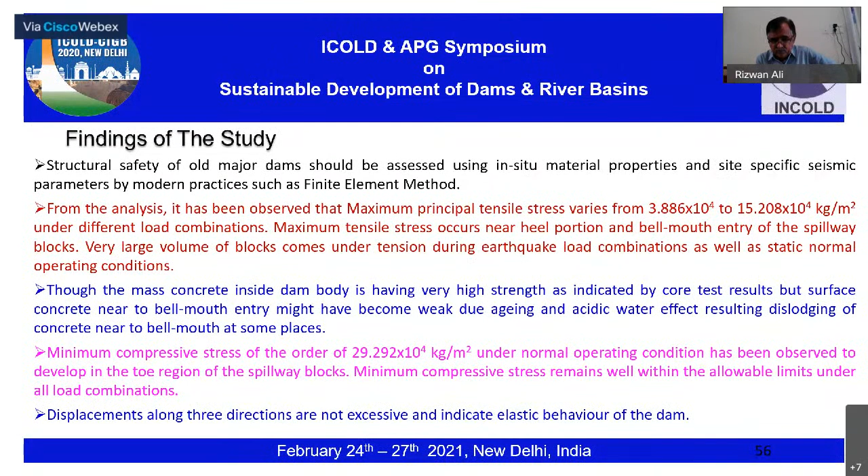Remedial measures suggested by CWPRS are that loose and weak concrete near the bell mouth entry should be chipped out and repaired using micro concrete, epoxy concrete, and mortar after assessing suitability of these materials under dry as well as saturated conditions. Acid resistant coating should be provided on the finished surface of the entire under-sluice barrel in all spillway blocks.

As an initiative, under DRIP, Government of India is implementing a World Bank funded dam rehabilitation and improvement project in 3 phases. Under DRIP phase 1, nearly 200 dams are being rehabilitated across 7 Indian states, including Karnataka, with an outlay of 3466 crore. More than 730 dams have been identified for rehabilitation under these states as well as 2 agencies, CWC and Bhakra Beas Management Board. Hirakud Dam is also under DRIP, so this repair work has to be taken up shortly.

Under DRIP, all major dams will be evaluated for rehabilitation. DRIP phase 2 and 3 are proposed to be completed in the next 10 years.

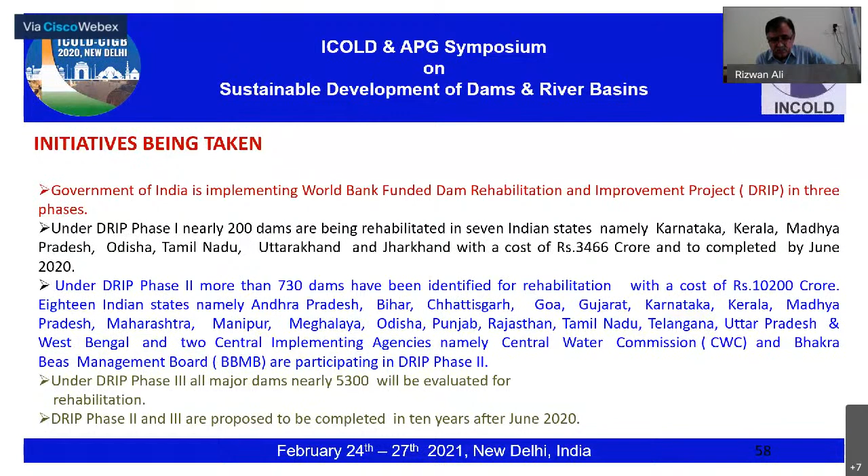Concluding remarks: new projects may not be constructed in the future due to dense population and cost involved, so old projects should be rehabilitated to enhance the functioning life of the project. The review of structural safety of old and distressed hydraulic structures should be carried out before taking strengthening measures. Site-specific seismic parameters should be used for analysis to get a real scenario. State-of-the-art methodologies such as seismic tomography, nuclear logging, tracer technique, and in-situ project tests are very useful in assessing the health of the dam. Detailed analysis using FEM should be carried out following BIS guidelines. Dams lying in seismic zone 4 and 5 should be assessed under dynamic loading conditions.

Thank you for your kind attention.